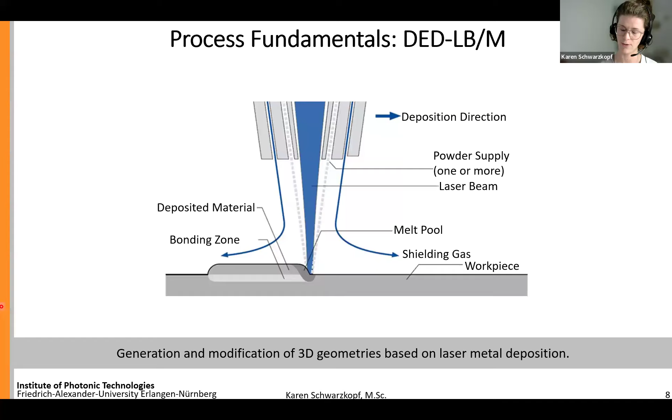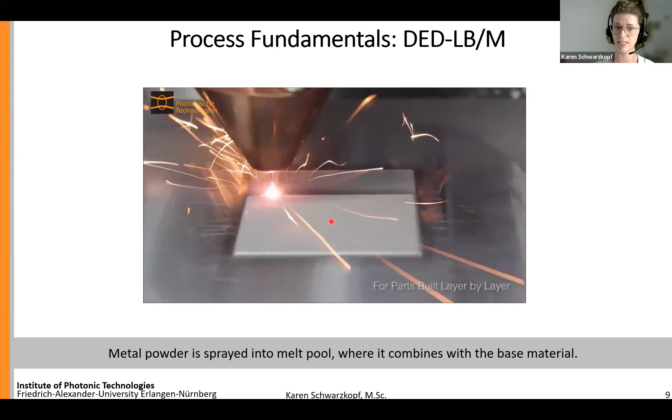As already mentioned, we have a powder nozzle, and our powder is delivered into the melt pool created by laser radiation. By adding this additional material to the melt pool, we can create a deposited track and get a 3D geometry. As you can see, there are different approaches and different abilities.

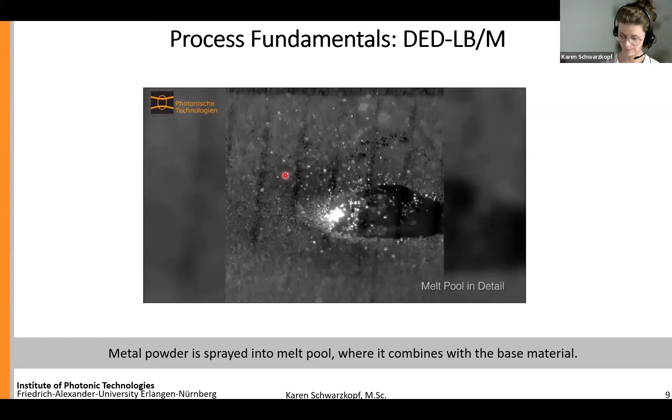All right, we are all familiar, I think, with laser material processing. And I assume that all of you know from experience that an inappropriate input of thermal energy provokes defects.

In the context of additive manufacturing, such defects can be crack formation, cold cracks. It can also lead to geometrical inaccuracies, or changes in geometrical accuracy. We also face gas porosity issues, which diminish the mechanical properties of our part. Another defect associated with a lack of thermal energy is lack of fusion, and also the inhomogeneous microstructure that forms due to inappropriate heat input.

Now, in the past, or conventional additive manufacturing processes, we normally use a Gaussian intensity distribution. This means we have the intensity concentrated in the center of our melt pool.

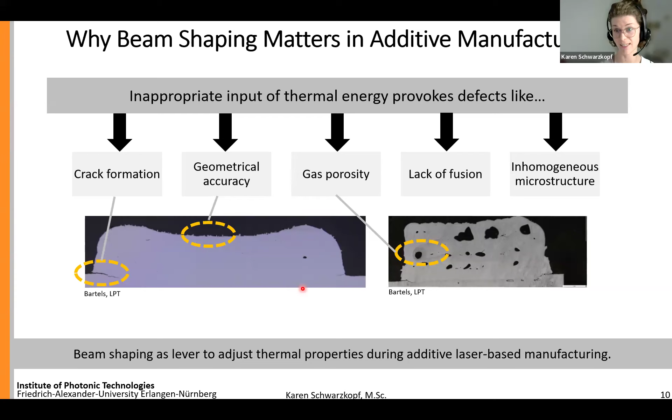Now we have the opportunity, with the Civan system but also different approaches based on beam shaping, to really adjust these thermal properties during the additive manufacturing process. On the next slide, I'd like to give a short overview of typical approaches that exist to adjust our thermal fields based on the adjustment of laser intensity distribution.

On the left side, you can see a diffractive optical element. This is basically an optical element based on diffraction. So what's happening is the light is guided into this optical element, and due to changes in refractive index, the light ray is bent.

These approaches, however, are limited to spatial manipulation of the intensity distribution, meaning we have no opportunity to really adjust certain things during our process.

A more advanced approach of beam shaping is so-called fiber core adjustment, which can be, for instance, a fiber core shaped as a square, but also more advanced techniques with a predefined spatial intensity distribution between a core beam and a ring beam. These approaches, for instance from Coherent, allow shifting power between the core beam and the ring beam.

As demonstrated in the video here, we're basically able to have a temporal adjustment of our intensity distribution. But still, we are restricted to predefined intensity distributions.

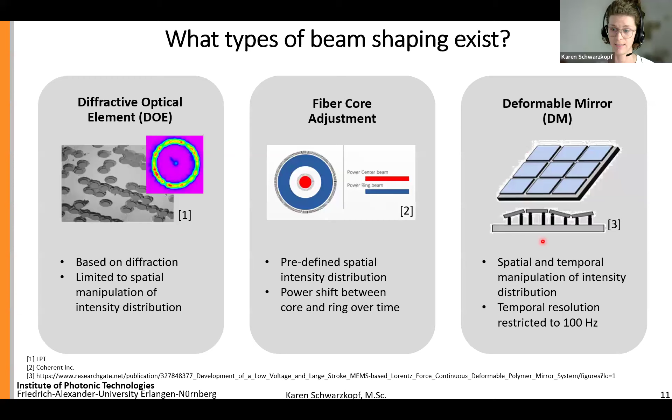Now, why is it even important to get an understanding of spatial and temporal adjustment of the intensity distribution? The short answer is we're able to get flexibility by adapting to different requirements during the printing process.

If we're able to adjust our intensity distribution not only in space but in time, it would be possible to change, for instance, geometrical structures, as you can see here as an example on the left side. It might also help us print different materials because we're really able to adjust our thermal properties. And one idea of this approach is that we're really able to get functional grading, meaning we can adjust, for instance, microstructural or mechanical properties depending on our building height.

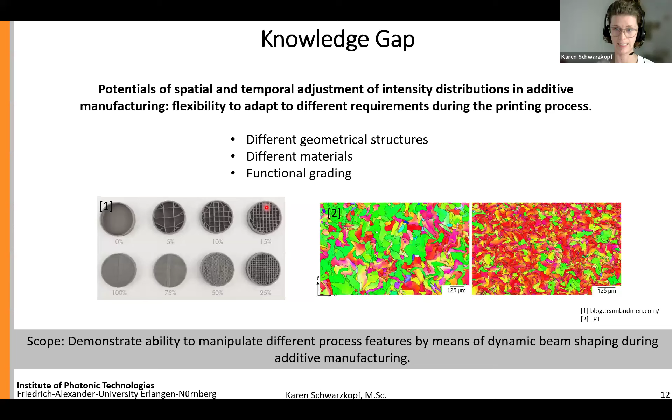Now, I've been talking a lot about different approaches of beam shaping, and you're all here to understand how the Civan system is working. This system really differs from other technologies, as it combines basically 32 single laser beams.

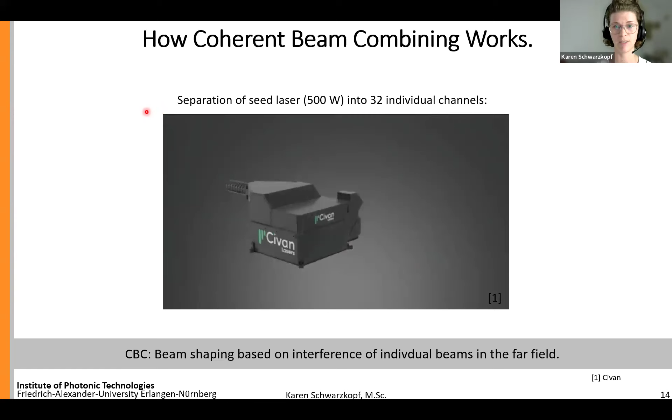To get a better understanding of how this technology really works, I brought this video with me, which basically visualizes the approach of coherent beam combining. So instead of having one single beam, we basically split a seed laser into 32 individual channels. These 32 individual channels are then phase-shifted, meaning a constructive and destructive interference is created in the far field, basically allowing us to create arbitrary beam shapes.

To get a better understanding of how this works in reality, I brought a snippet of the software that Civan is providing, to show you how to create such an intensity distribution. Basically, we have a 32 by 32 grid, which can also be 64 by 64, that allows you to distribute energy packages in it. In the simplest case, by pointing an energy package in the middle, you can create a point-like beam profile that resembles a Gaussian intensity distribution.

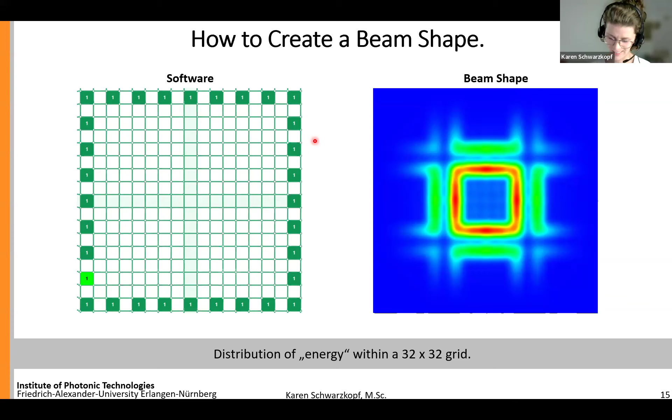What happens if you start distributing the energy in different fields is demonstrated here. For instance, for a square-like intensity distribution, by accordingly putting the energy packages in the edges, a square-like intensity distribution is created. These two beam shapes are rather ordinary, I would call it. You can see on the next slide that even more challenging beam shapes can be created on the run, in a really easy way, just by distributing these energy packages within this grid.

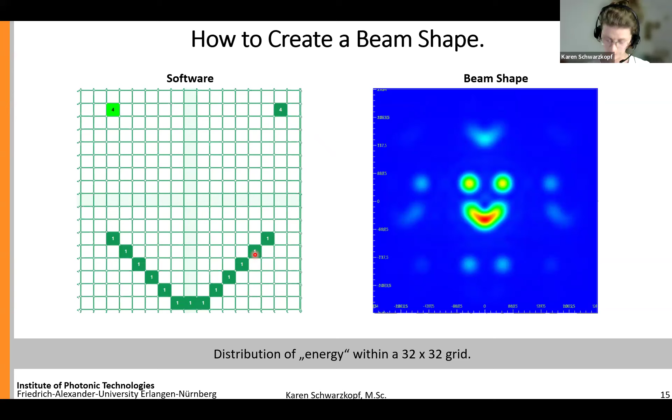Since we are not putting a mask of intensity distribution on our beam shapes, but rather scanning our beam shape, there's also a third characteristic of the laser, called the beam shape frequency. This defines how long each point rests at a position in time. As an additional example, I wanted to show you a short video that demonstrates that this beam shape frequency is also really influencing our process.

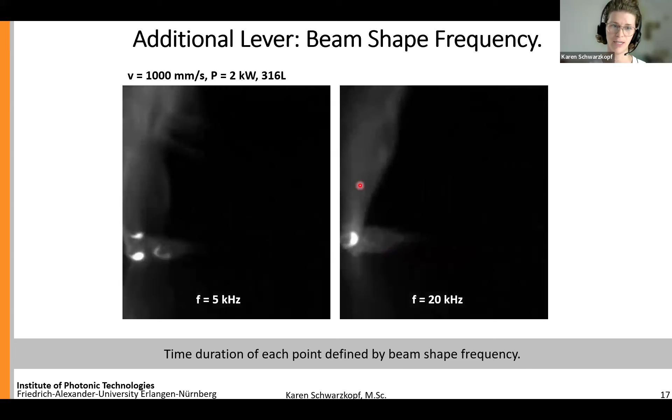On the left side, you can see a video created with a spiral beam shape at a 5 kilohertz beam shape frequency. On the right side, you can see the same spiral intensity distribution, working with a 20 kilohertz frequency. You can see that the melt pool is really differing, and not only the melt pool, but also the evaporation. I don't want to go into detail here, as this will be part of the very last slides, because in this presentation I want to focus on the beam shape frequency.

Before heading into the results, I first want to introduce our machine concept, because I think some of you are asking, okay, how can you implement this laser into a really industrial DED machine? This is the answer. Our DED machine was funded by the German Research Foundation with the scope of having in-situ alloying deposition based on beam shaping. This basically means that we have a Civan laser incorporated in a DED cell.

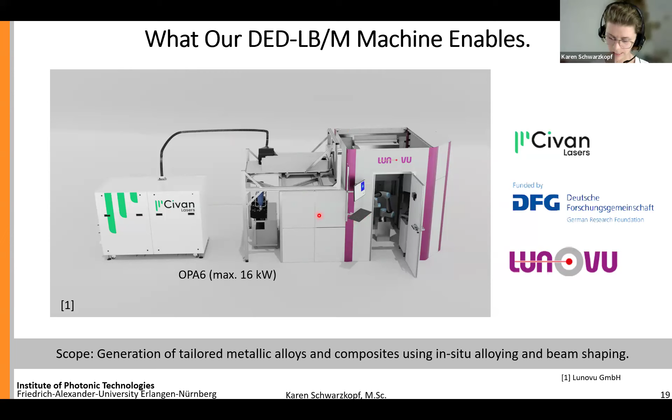This cell looks, if you're now looking inside it, like this. What you can see here is, at first glance, the processing head, where all the powder is gathered onto the material or substrate surface. The powder itself is directed from these powder feeders here. We have 4 of them, which allows us to combine 4 different powder mixtures in the process zone.

What we also have are different approaches to really measure the temperature, but also the surface roughness of our process. In general, we have different focal lengths that allow us to steer the beam shape size. One important thing to mention is that we have a 5-axis system, which allows us to really move our workpiece underneath the laser path. So we do not employ any scanner optics here, but are really moving our workpiece in 5 different directions, translational and also rotational.

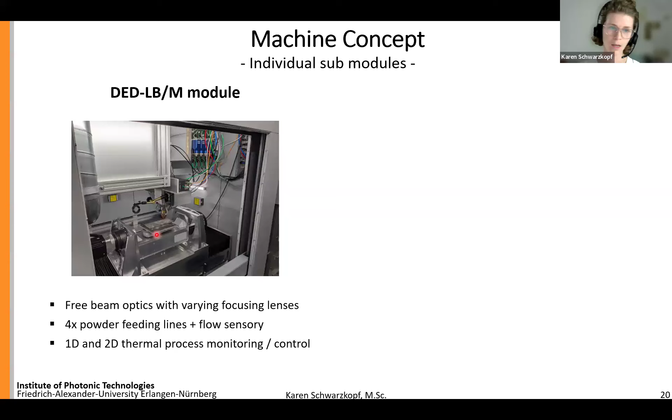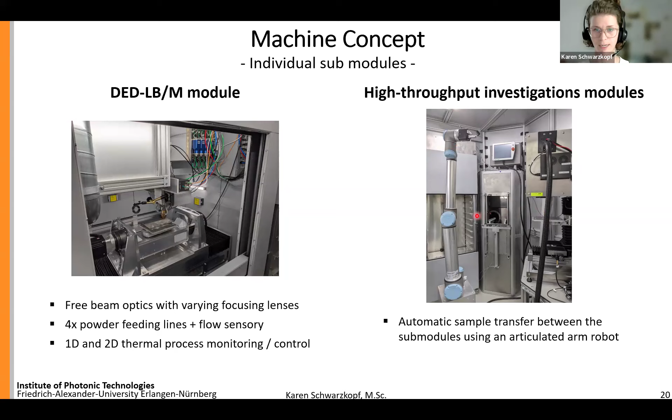Now, turning inside the cell, we also see a robot and different other modules. The idea is that we can really automatically develop different alloying compositions. This will be done by a robot, which helps us grab the different samples, put them into the material processing zone, where processing then happens. After that, the robot takes the sample into a cleaning chamber, where it is subsequently analyzed by chemical composition based on a LIBS, laser-induced breakdown spectroscopy, approach.

Okay, this is how it's generally looking, but at the moment we are more interested in understanding how these different beam shapes influence our material processing approach.

Therefore, we employed a high-speed camera system that allows us to coaxially observe our process zone, which is highlighted here by the green dot. We also employed a ratio pyrometer to get thermal information from the process, and additionally an illumination laser to visualize different aspects of our melt pool.

Important to mention is again the powder nozzle, highlighted here in yellow, where 3 different channels from the powder supplier merge together, feeding powder into the melt.

On the left side, you can see the dimensions of the field of view from the camera coaxially, and also the ratio pyrometer up here.

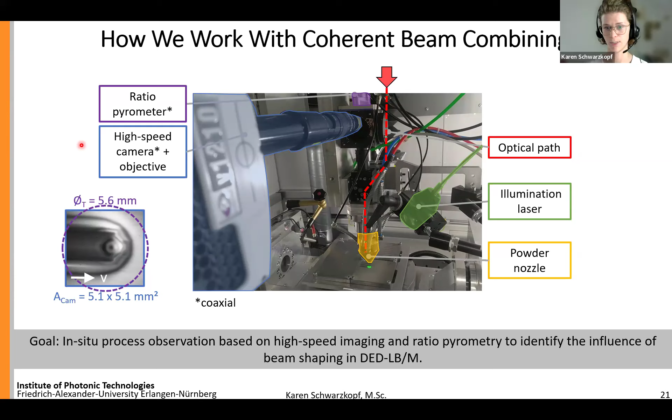One short announcement for the ratio pyrometer: it's basically an approach that allows us to derive temperature information only based on a ratio between 2 frequency spectra, so we do not need emissivity values in order to get thermal information.

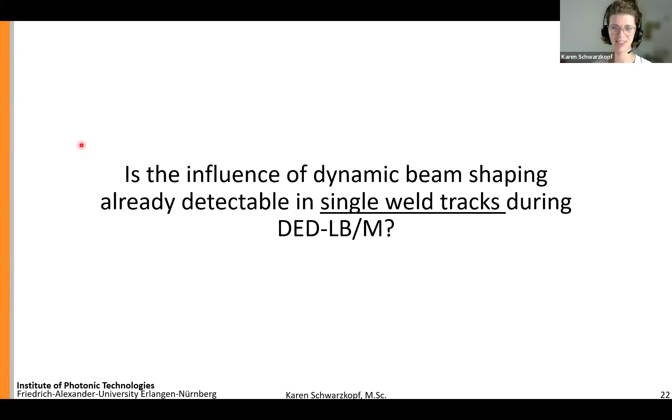Now, the first question we were asking ourselves is whether the influence of dynamic beam shaping is already detectable in single weld tracks during the DED process. For those of you who know my presentation already, the short answer is yes, and this is visualized here in these 2 high-speed videos that compare the point intensity distribution to a ring distribution.

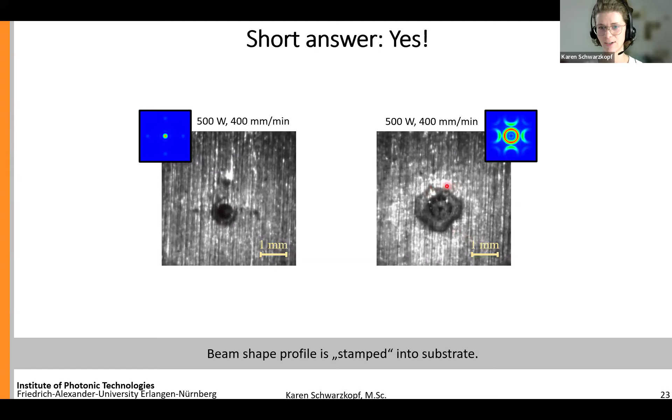As you can see, it's not only the size that differs for the 2 beam shapes, but also the influence of these higher modes placed here, and the powder impingement happens earlier for the ring. So basically what follows from this video is that the beam shape is stamped into the substrate.

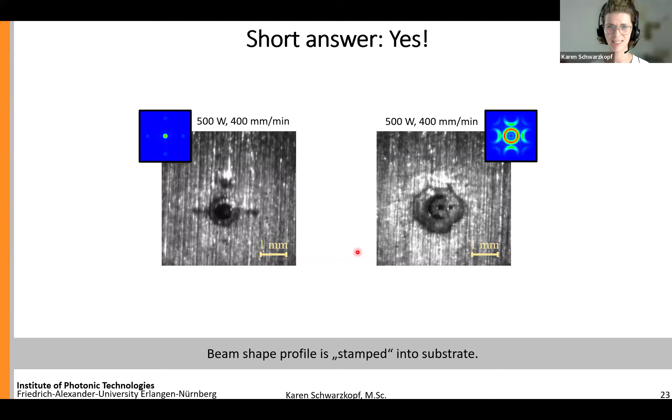And since we are a research institute, this answer is not sufficient for us. Therefore, we employed the following methodology to answer the research question: basically, we were comparing 5 different beam shapes, which I will go into detail on in the next slide.

We were then using in-situ process analysis, basically high-speed imaging and thermal process analysis, to understand how dynamic beam shaping is influencing our melt pool dimensions - for instance, the melt pool area, but also the morphology, and also the melt pool temperature.

As the next step, we wanted to correlate these findings with ex situ characterization, like for instance the microstructure, but also the resulting hardness.

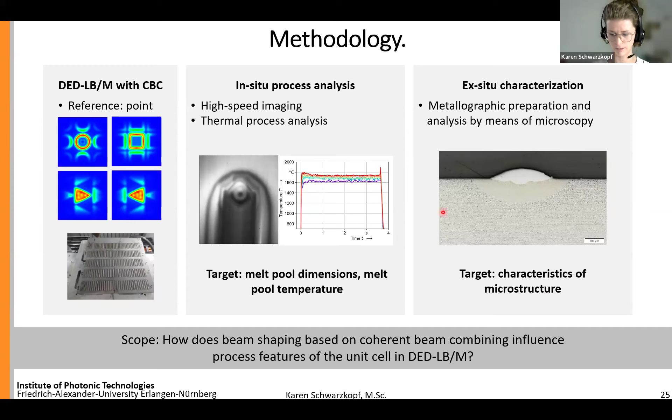As already mentioned, we combined 5 different beam shapes, and the order of sequence was as follows. As initial beam shape, a point was employed solely as a reference compared to a Gaussian intensity distribution that is conventionally used.

Next, a square-like intensity distribution was employed, as it was reported in literature that a homogenization of the temperature field can be achieved by that, followed by a triangular shape, where the rear or tip of the triangle is directing opposite to the feed direction.

This is followed by a ring shape, and then a triangle shape located in the opposite direction, namely the tip is facing into the feed direction. And as already mentioned before...

The technology of coherent beam combining comes with some restrictions that have to be considered. Namely, not all of the intensity is gathered in the main lobe, which is highlighted here in the red area, but also some parts are located in the side lobes. How this influences our melt pool geometry will be shown in the next two slides.

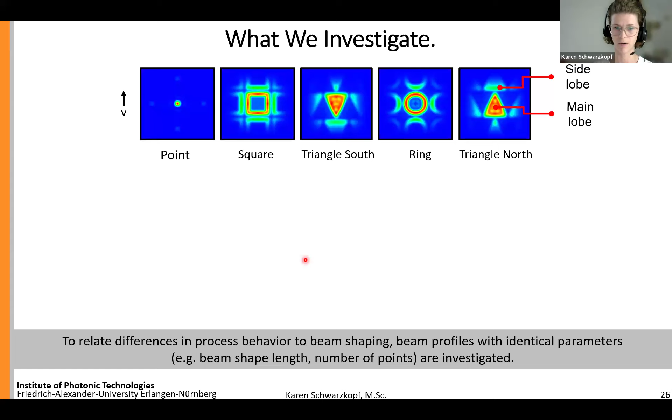What is important to mention is that the beam shapes here were conceptualized in such a way that the length or width was kept constant, in order to really relate differences that are observed to the beam shape itself and not to the size.

Short overview again of the process parameters. The experiments I'm going to talk about in the next slides were all conducted with 500 watts, a feed rate of 400 millimeters per minute, and a powder mass flow of 2.9 grams per minute. As material, a hot working tool steel was employed, also known as H11, and the substrate was made of the same material.

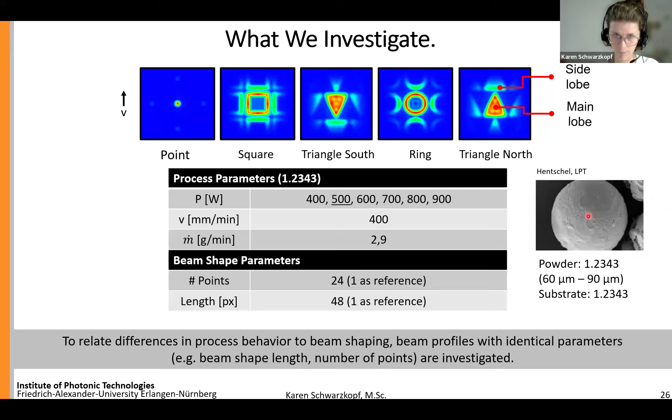Now let's jump into the first findings, dealing with the melt pool geometry and the process stability. Here you can see the in-situ video from the melt pool geometry, and in this position, the resulting top view of the weld seam.

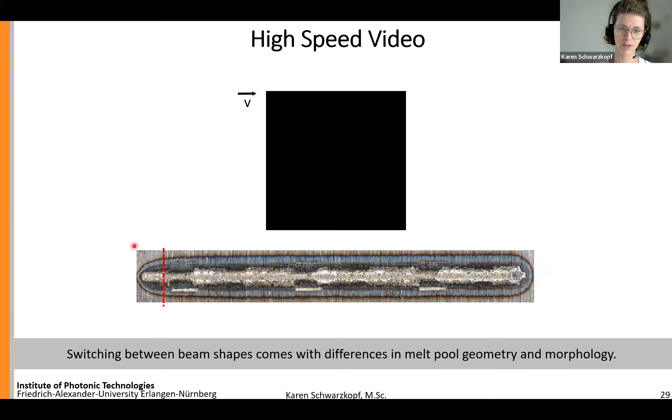As you can see directly from the video, when changing beam shape, we also see differences in our weld topology. We can really see the differences of the beam shapes already in our melt pool. One thing that also has to be mentioned here is that these changes occur in a repetitive way, meaning that the dynamic beam shaping approach is really leading to a repetitive material response.

So in that case, each beam shape was repeated 3 times, and the time between the beam shapes was 300 milliseconds, which is important for the interpretation of the following diagram.

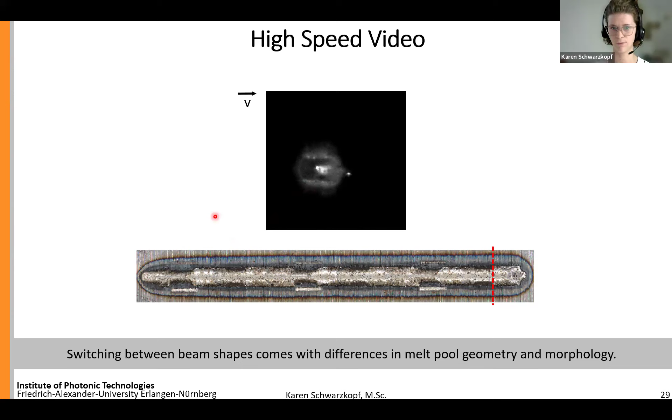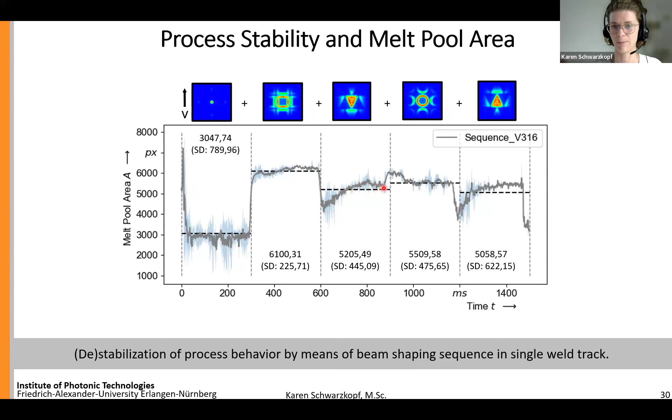Now, if we are switching to the melt pool morphology, which is also well known to influence microstructural appearances, it is interesting to see this for the ring.

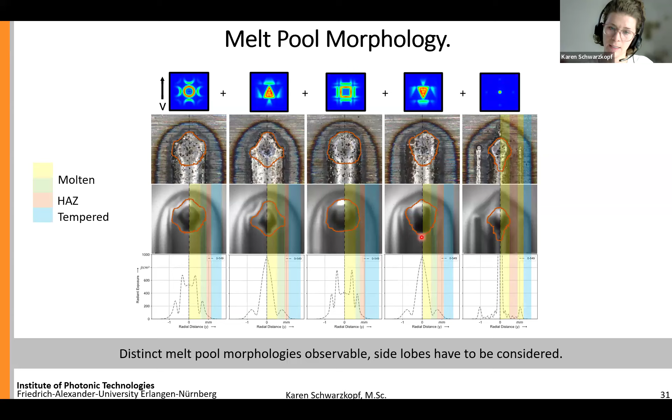And if we now compare the morphology of our melt pools, we can see two types: the ring and square beam shapes, which have a straight transition between the melt pool and the solid material, whereas the other three beam shapes rather have a teardrop-like melt pool, where we expect different conditions of cooling behavior depending on the center and the sides. So in the center, we're expecting a slower cooling compared to the sides.

All right, now we have seen that we do see differences in our melt pool size, and we do see differences in our melt pool morphology. Now, the next question is, how does that affect the temperature that is related to our different intensity profiles?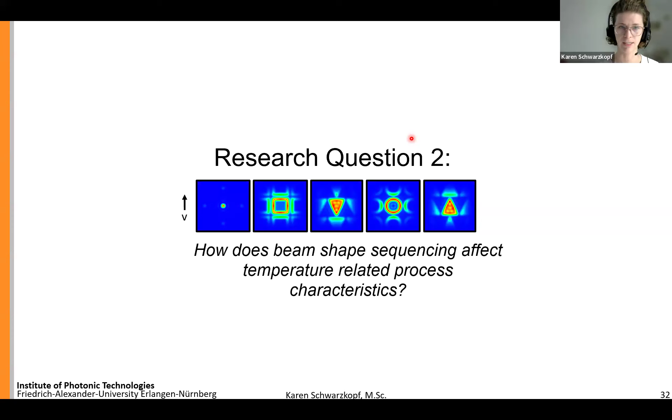Based on the pyrometer investigation, we can see the following. Let me basically introduce the whole figure to you. First of all, this is a longitudinal cross-section, and this really reveals that by applying these different beam shapes, we also have different penetration depths. So it's not only the outer or top-view appearance that is changing, but also the penetration inside the material.

And what is now interesting to see is that those beam shapes, basically the ring and the square, that exhibit the least penetration depth, exhibit the highest measured temperature. And what is again interesting to see is that we can really get a change in our temperature measured depending on our beam shapes.

Since the ratio pyrometer is relying only on a one-dimensional temperature profile, we also wanted to investigate how that really looks in the two-dimensional temperature field. We did some additional temperature measurements with a thermal camera, and this looks like this.

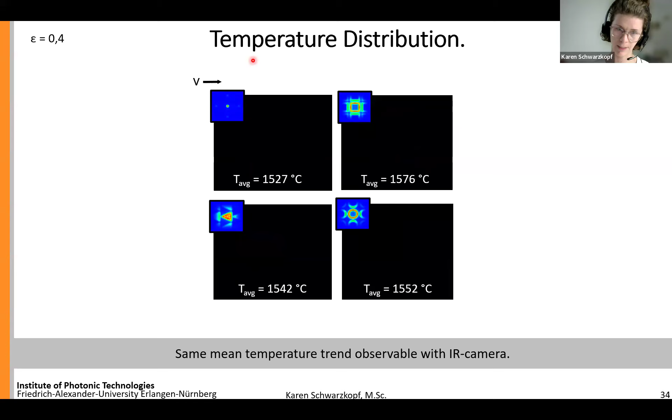And this can be seen on the next slide. So for the point-like intensity distribution, we do see a cellular solidification morphology, or most likely a cellular solidification morphology. Whereas when we are heading to the beam shapes that are exhibiting higher mean temperatures, we are getting columnar solidification morphologies. This is really interesting again, because the differences we could see in the temperature do really occur in our melt pool, in our microstructure as well.

Now we would expect the triangular beam shapes to be somewhere in between, because here we were measuring the lowest temperature, whereas here we were measuring the highest temperature. And this hypothesis is also confirmed in the optical microscopy images, where we can see a cellular solidification morphology for the two triangular beam shapes.

In order to really understand what is going on at a microscopic level, further investigations with a scanning electron microscope, but also an EBSD approach, need to be conducted. We want to understand how, or if, we can see differences in our grain structure, for instance the orientation, but also the grain size, because if we can see that, we can also tell what is going on from the physical perspective at the microstructural level.

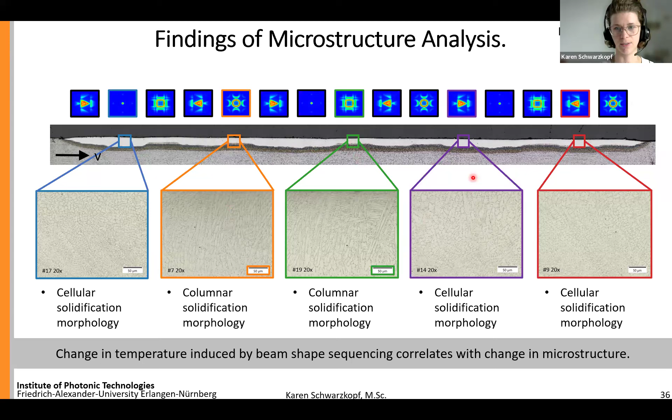Oh sorry, I forgot that I also wanted to share this image with you, where we can basically see the transition region, because if I'm stepping back, these regions here were imaged in the center within one beam shape. But what is also interesting to see, since we never had that before, is what is happening in the transition between two beam shapes. This again emphasizes that we are able to really transfer from a cellular-like structure to a rather columnar structure only by changing our beam shape here.

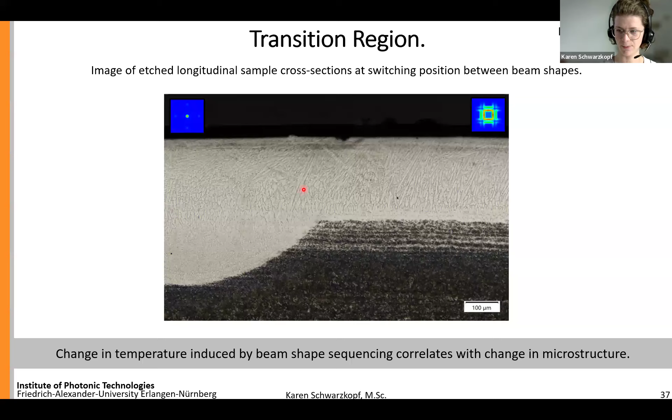All right, now let's jump back to the hardness measurement again. As already mentioned, we do see differences in temperature and also microstructure, and therefore we expect differences to see also in the micro hardness, and this is true. This can be confirmed by a Vickers hardness test with 0.5 load. Basically, what we can see here is that we get lower hardness values for the point and also the triangular shapes, and higher hardness levels for the square and the ring shape.

Since this is done on single track experiments, we have to interpret these results with caution. But I think what is really becoming clear is that we are able to see differences in the micro hardness depending on our beam shape. So far, it has not been understood why we see higher hardness values for the columnar oriented microstructure, because from theory we would expect lower values here, but we are, as I mentioned, digging into microstructural analysis based on EBSD to understand better what is going on here.

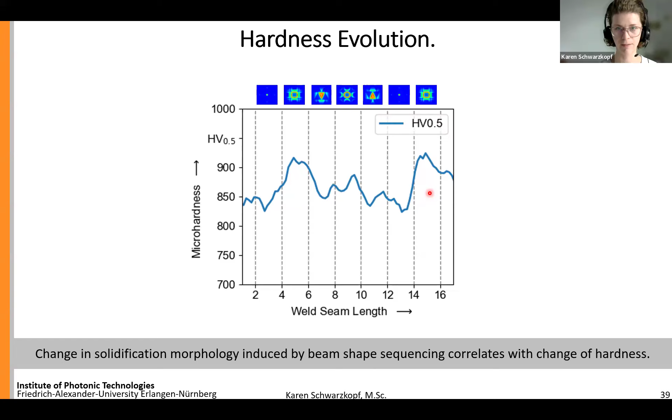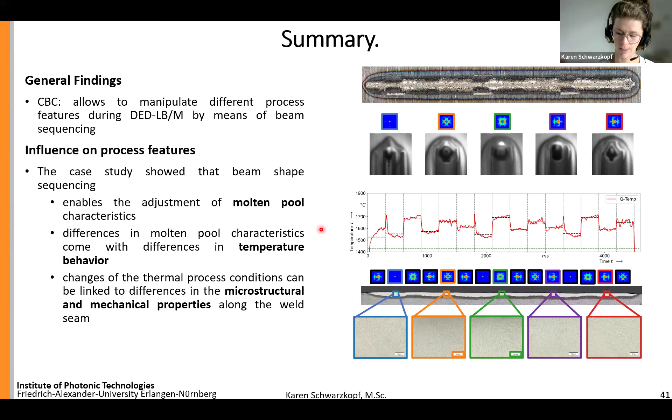This slide just quickly summarizes the findings I was already referring to. By being able to change between beam shapes during the powder deposition process, it was demonstrated that not only the melt pool shape can be altered, but also the temperature and therefore the microstructure, and as a consequence, also mechanical properties. On the next slide, I'd like to share some future ideas with you.

How to transfer that knowledge to the application. As I already mentioned, this case study was relying on single track experiments. So the next step would be to really scale up, meaning heading to volumetric build-ups, for instance, as shown here.

One approach would be to focus on microstructure adjustment. First ideas can already be shown here, where we could see a columnar structure in the center and also the bottom, where one defined beam shape was applied, whereas on the top of the volumetric build-up, a different beam shape was applied.

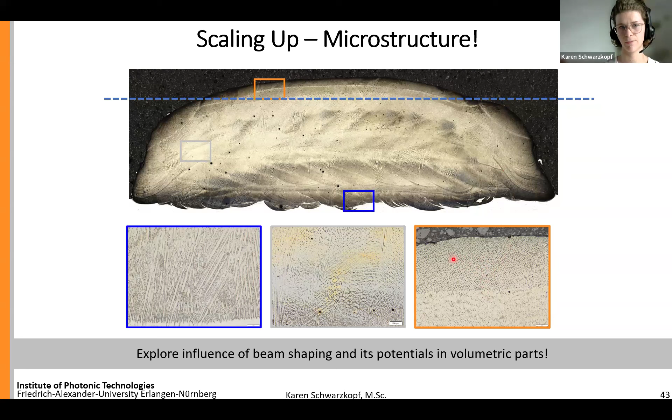A change in microstructure, namely towards equiaxed grains, was observed. So next to microstructural adjustments in volumetric build-ups, it's also the increase of productivity that can come with different beam shapes. First insights have been generated here, for instance, with a Civan logo beam shape, a snowflake, and hourglass, which basically steers the melt pool like this.

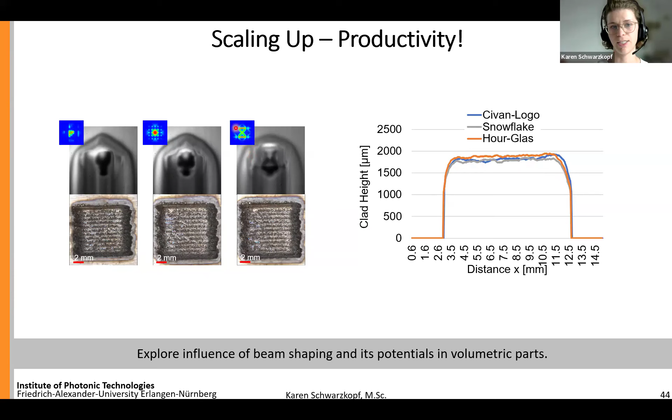Now, I quickly wanted to jump back to the start, where I was referring to the beam shape frequency as a novelty or unique property of the beam shape technology provided by Civan.

As you can see here again, this was the spiral. We can see differences in our weld appearance, which basically shows us that we can steer not only the melt pool shape, but also the solidification of the melt pool.

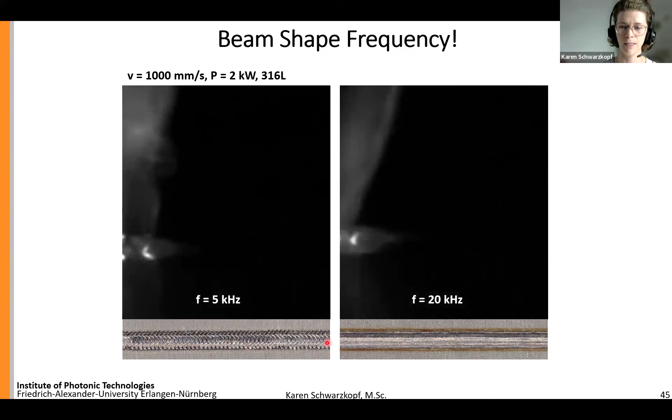So a further idea is to really look into how we can use beam shape frequency to steer our process. And last but not least, because this question occurs from time to time, the technology of Civan basically allows creating arbitrary beam shapes.

And the question now is, what beam shape shall I use? I think this is one point that we as a community have to define and find out together, and approaches to really adjust beam shapes or find optimal beam shapes are based on simulation work.

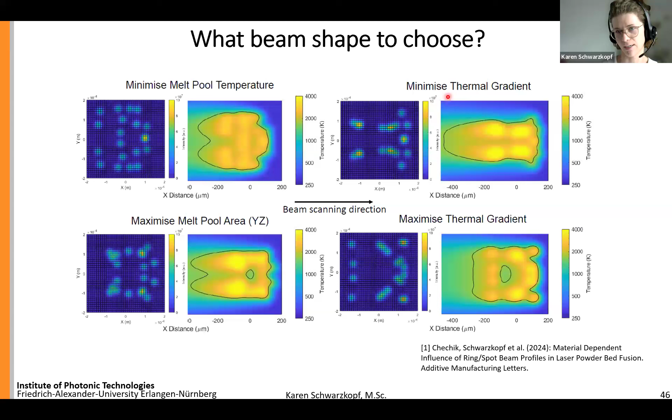For instance, my colleague Lova Chechik developed a heat conduction model that allows determining, for instance, different approaches like the minimum melt pool temperature and a minimized thermal gradient, and it really gives you back an intensity distribution that could lead to this minimized thermal gradient.

All right, this is it from my side. Thank you very much for your attention, and I'm happy to answer your questions if there are any.